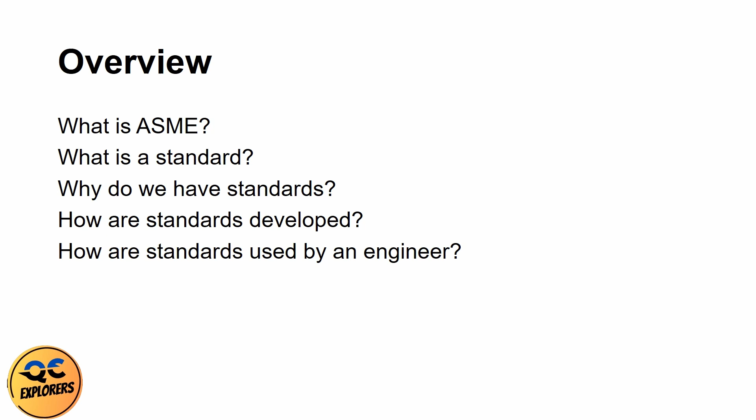First, what is the American Society of Mechanical Engineers? ASME, also simply known as ASME, is a professional engineering society that serves many roles, including hosting technical events, public affairs and outreach efforts, student and early career development, and standards and certification.

ASME's mission statement is to serve diverse global communities by advancing, disseminating, and applying engineering knowledge for improving the quality of life and communicating the excitement of engineering.

ASME was founded in 1880 to provide a setting for engineers to discuss concerns brought by the rise of the Industrial Revolution. The Society's founders were some of the more prominent machine builders and technical innovators of the late 19th century, led by prominent steel engineer Alexander Lyman Holley, Henry Rossiter Worthington, John Edison Sweet, and Matthias N. Forney.

Today, ASME focuses on technical issues, training and professional development, research advancement, government relations, and other forms of outreach. ASME has a presence within North America and around the world, with over 140,000 members in over 150 countries. We are one of the world's largest technical publishing operations.

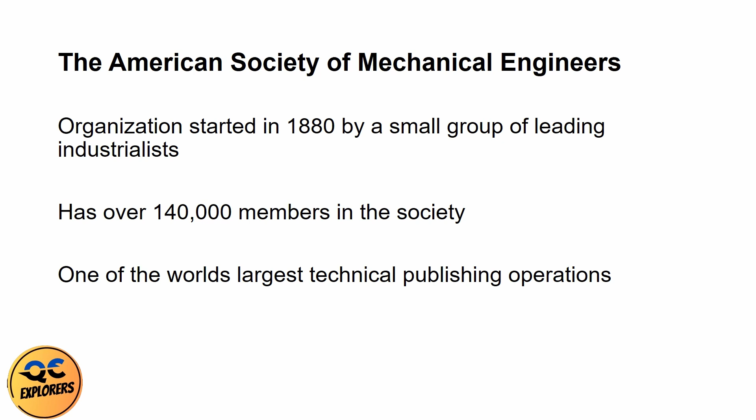Next, what is a standard? A standard is a set of technical definitions, instructions, rules, guidelines, or characteristics set forth to provide consistent and comparable results, including items manufactured uniformly, providing for interchangeability, tests and analyses conducted reliably, minimizing the uncertainty of the results, and facilities designed and constructed for safe operation.

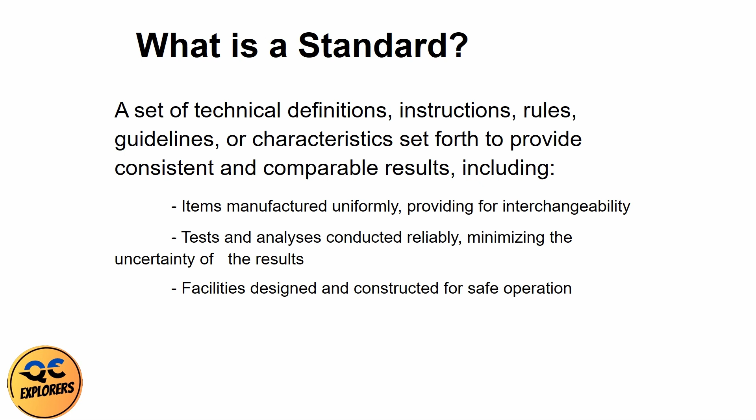Standards are documents that could help provide a reference baseline for making engineering decisions. They are written using engineering experience and generally accepted practices.

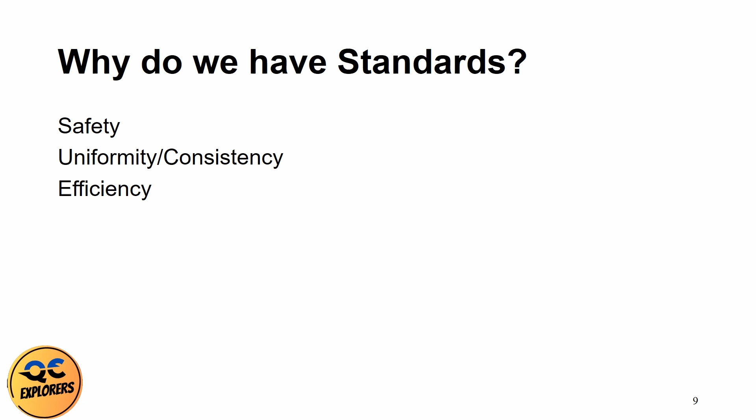Why do we have standards? Standards are considered a common language that benefits manufacturers, designers, and consumers. Having standards helps minimize situations where we could be re-engineering the wheel. All standards promote four key principles: safety, uniformity and consistency, efficiency, and commerce and trade. In the following slides, we will further define these four principles.

Around the time of the founding of the Society, many industrial accidents were occurring due to a lack of safety standards and oversight in the industry. One of the accidents that stands out is that of the SS Sultana.

The SS Sultana was a Civil War-era Mississippi River steamboat paddle wheel that contained 4 boilers. The Sultana was used to transport Civil War soldiers, livestock, and cotton. It regularly went from New Orleans to St. Louis. On April 21, 1865, the steamer left New Orleans carrying livestock and Civil War POW soldiers.

In Vicksburg, Mississippi, the Sultana made a scheduled stop to pick up more passengers and made a series of hasty repairs to the boilers. Rather than have a bad boiler replaced, a small patch repair was made to reinforce a leaking area. A section of bulged boiler plate was removed, and a patch of lesser thickness than the parent plate was riveted in its place.

The repair took less than a day, while a replacement boiler would have taken 3 days. The steamship was way past its maximum capacity. The Sultana had a legal capacity of 376 passengers. It's estimated that after Vicksburg, the Sultana contained about 2,400 passengers.

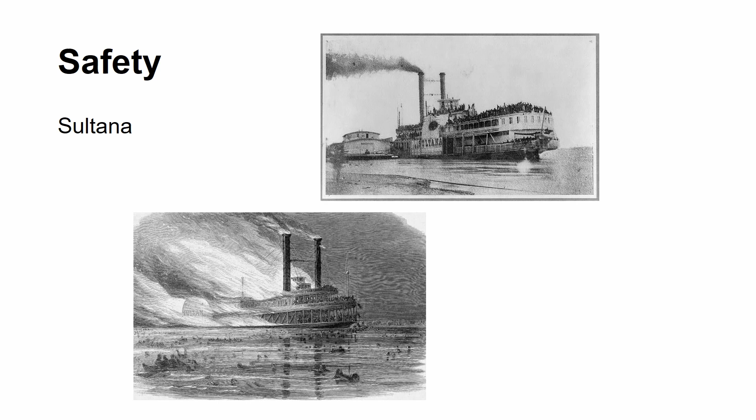The Grover Shoe Factory disaster is significant because it led Massachusetts to establish a Board of Boiler Rules. The board consisted of 5 members to oversee boiler regulations. It was the first of its kind.

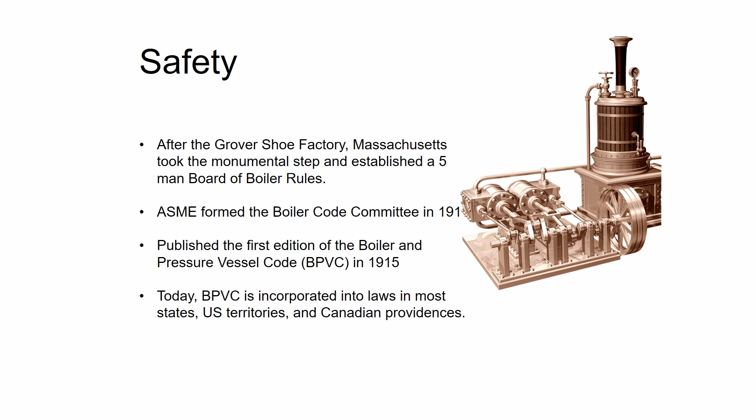Aside from addressing steam boilers, a big early problem was the lack of interoperability of fasteners. ASME helped set standards for things like screw threads, nuts, and bolts, which made it easier to service equipment with off-the-shelf fasteners. It also played a leading role in the development of important safety standards governing the safety of equipment like cranes and elevators.

Some key events in the development of codes and standards include: 1880, ASME established; 1884, first ASME standard for pressure testing of boilers; 1905, publication of first edition of standard for proportions of machine screw sizes; 1914, publication of first edition of the Boiler Code; 1916, publication of first edition of the Safety Code for Cranes; 1918, founding member of American Engineering Standards Committee, later known as ANSI; 1921, publication of Safety Code for Elevators.

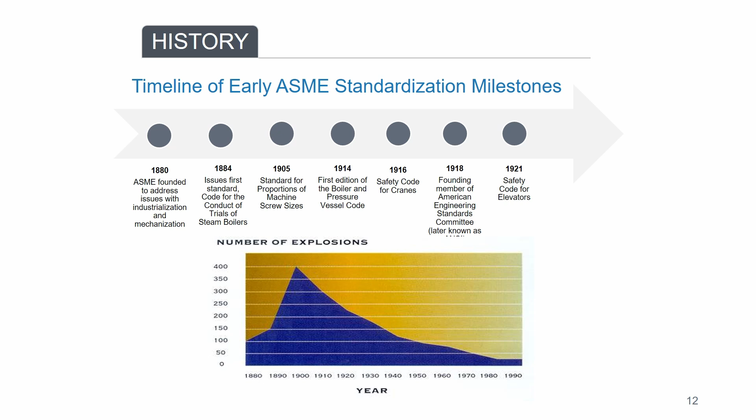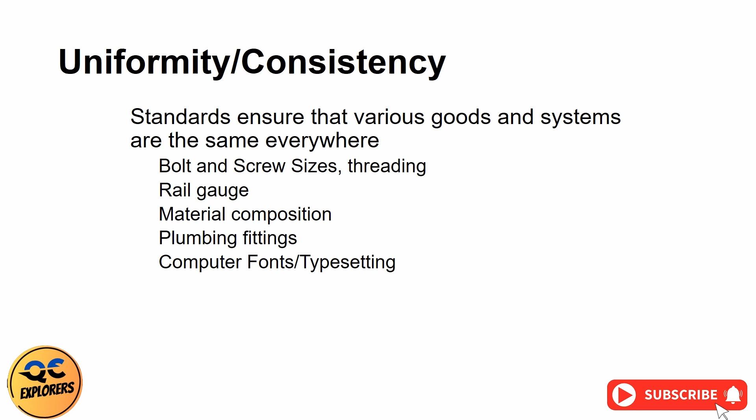Standards help to establish uniformity and consistency among products that you use every day. For example, thanks to product standards, an engineer does not have to concern themselves with who manufactured a bolt to know that it will fit with its corresponding size nut or washer. Another example is that a train can get from New York to California thanks to standardized rail gauges. These are a few small examples of the effect of codes in everything around us.

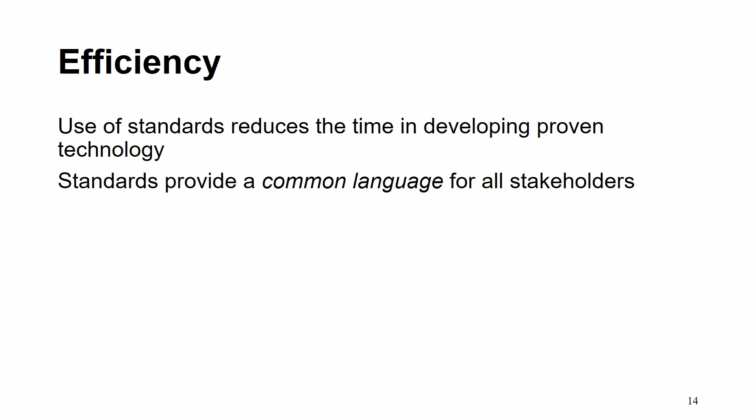Using standards helps to reduce production time by using existing and proven technology. Standards do this by providing a common language for all stakeholders. Owners, designers, inspectors, and others can ensure consistency and uniformity in the design expectations. Manufacturing to a certain standard implies a high level of quality to the customer. By being consistent and effective in the design, a manufacturer can confidently reproduce existing designs in large quantities.

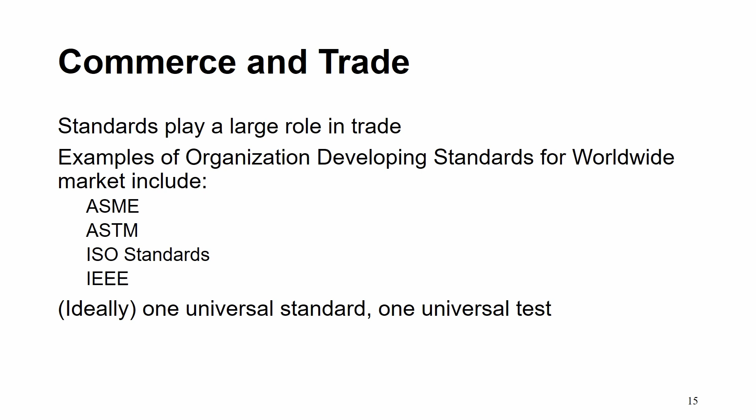There are various standards development organizations, SDOs, that develop standards for industry: ASME, the international ISO standards, ASTM, and IEEE are all examples of organizations producing standards for the worldwide market. Ultimately, it is the goal for manufacturers to have one standard and one set of criteria worldwide to streamline the manufacturing process. Next, we will discuss how standards are developed.

The American National Standards Institute, ANSI, is a nonprofit organization established in 1918. While ANSI does not create standards, they administer and coordinate the U.S. Standardization and Conformity Assessment System. ANSI acts as a clearinghouse, which approves standards submitted by accredited SDOs, designating them as American National Standards. They also help to make sure that no two SDOs are developing identical standards.

There are various types of SDOs, such as professional societies, trade associations, testing and certifying organizations, and organizations whose main business is standards development. A professional society is a nonprofit organization seeking to further a particular profession, the interests of individuals engaged in that profession, and the public interest. Some examples of professional societies are the American Society of Mechanical Engineers (ASME), American Society of Civil Engineers (ASCE), and the Society of Automotive Engineers (SAE).

A trade association is an organization founded and funded by businesses that operate in a specific industry, such as the American Petroleum Institute (API) or the American Gas Association (AGA). Testing and certifying organizations, such as Underwriters' Laboratories, perform testing and safety certification on products submitted to them. Some organizations where their main business is standards development are the American Society for Testing and Materials (ASTM), National Fire Protection Association (NFPA), and International Standards Organization (ISO).

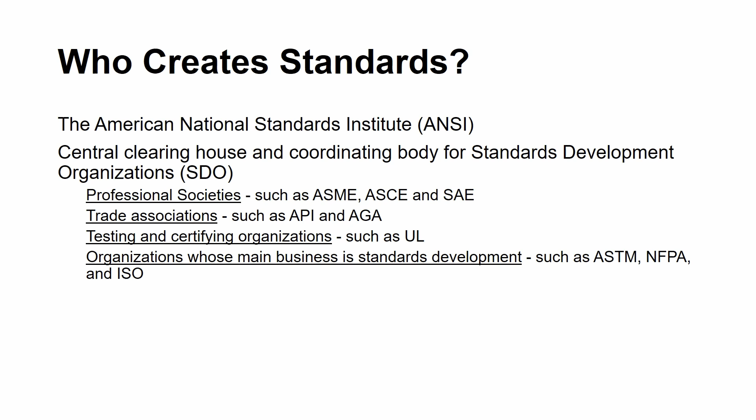There are several different types of standards. The first type is voluntary consensus standards. These standards are written by industry experts with the intent to benefit the majority of the industry. We will explore voluntary consensus standards in more detail in later slides. De facto standards are those which have become a standard because they are widely used, and the acceptance of them as a standard is determined by the marketplace. An example of a de facto standard is the QWERTY keyboard.

Consortia standards are developed by companies that agree to work together to solve a specific market need. Participation in the development of these types of standards is limited to members of the consortia and often requires a substantial financial contribution. Regulatory standards are either written or adopted by government agencies and are enforceable by law. Voluntary standards often become regulatory standards when they are incorporated into enforceable regulations. An example of a type of standard that does not fit into one of these previously described types are company or corporate standards, which are internal documents developed for their own use.

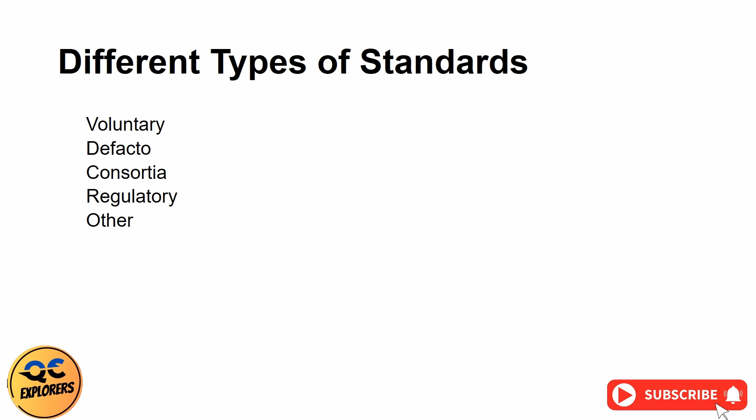Now, let's focus on how standards are developed within ASME in particular. ASME standards are developed by volunteers from industry and government and considered voluntary consensus standards. This means that the standards developed by ASME are approved using a consensus process, which will be described on the following slides, and that their use is optional until it has been incorporated into law or its use has been mandated in a contract. ASME has established, and continues to establish, various committees which each take part in the development of one or more standards.

These committees are comprised of members who are volunteer experts from around the globe from various industries. These experts are the ones who help to keep ASME standards updated to meet the needs of the industry as it evolves. ASME recruits its committee members from all across the globe to be sure that ASME standards are relevant and to understand the local needs of all potential users.

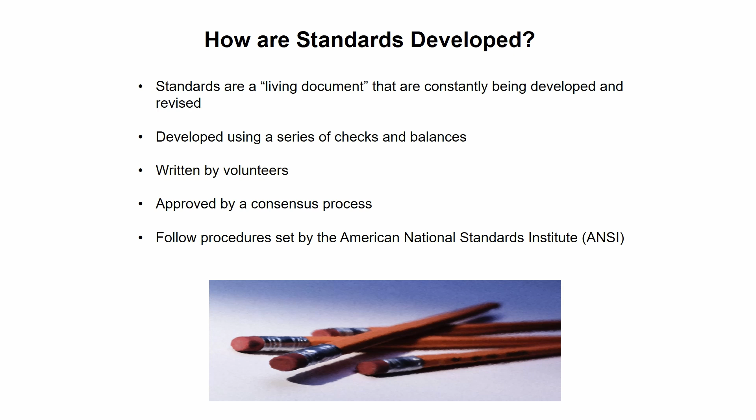ASME standards actions are approved by consensus. Consensus means there is substantial agreement by the affected interest categories on the proposed action. During the approval process, all views are considered and attempts are made to resolve any objections from the consensus body or any other source. In some instances, it is not possible to satisfy all objections.

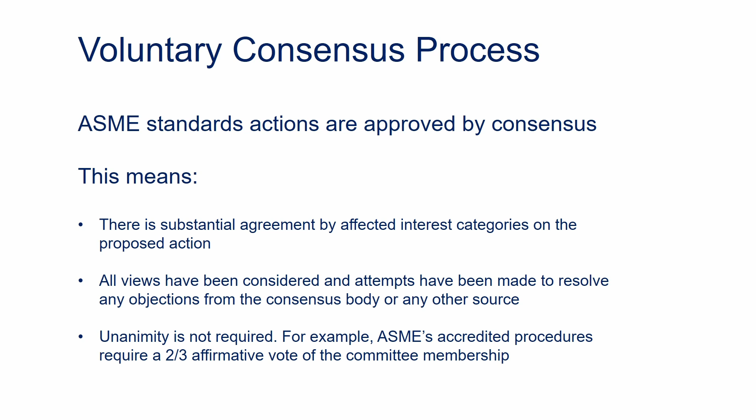For consensus to be reached, unanimity is not required. This means that after attempts to resolve remaining objections are made and the objection still stands, the item can move forward. ANSI procedures require more than a simple majority approval, but not necessarily unanimity. For example, ASME's accredited procedures require a two-thirds affirmative vote of the full consensus committee membership for a standards action to be considered approved.

There are three key principles of the consensus process: openness, balance of interest, and due process. Participation in the approval process is open to all those who are directly and materially affected by the activity in question. Participants in the standards development process are sought from diverse interest categories in order to maintain balance, so that no one category can control the direction of the standard.

All those who are affected have the right to due process. In regards to standards development, this means they have the right to express their opinion, have that opinion considered, and have the right to appeal if their suggestion is not accepted.

Now that we have discussed how ASME committees come to approve standards actions, here is a glimpse at the big picture of how a standard is developed from concept to publication. It all begins with the recognition of an industry need, engineering problem, or a new idea. Research is then needed to determine what is currently available and what types of solutions or processes are being used, if any.

Once it is determined that a standard is the right answer, its development is either assigned to an existing standards development committee or a new one is formed of experts from the related field. The development of the content of the standard can be a very lengthy process, particularly when there are strong opposing opinions. Once the content has been developed, it is sent through the approval process, keeping the key principles of consensus in mind as the action flows through the various levels of committee approval within ASME. Once it is approved by ASME, it is sent to ANSI for final approval and then proceeds to publication.

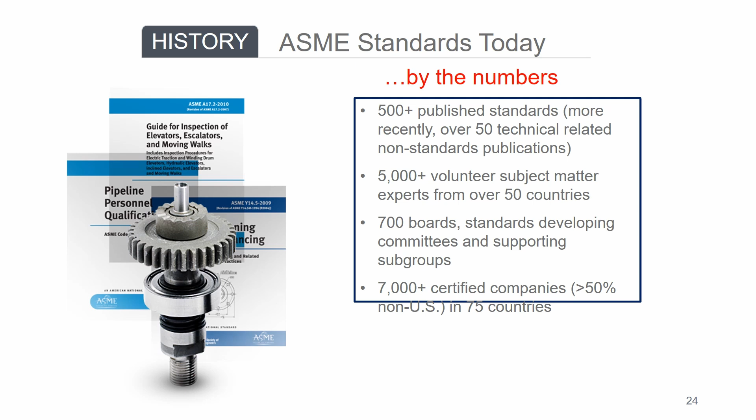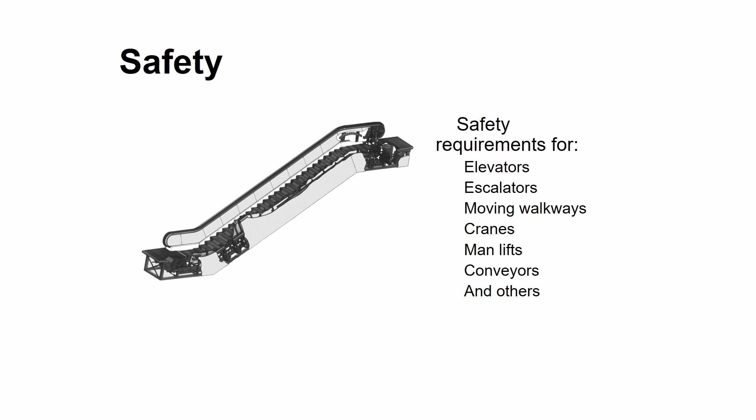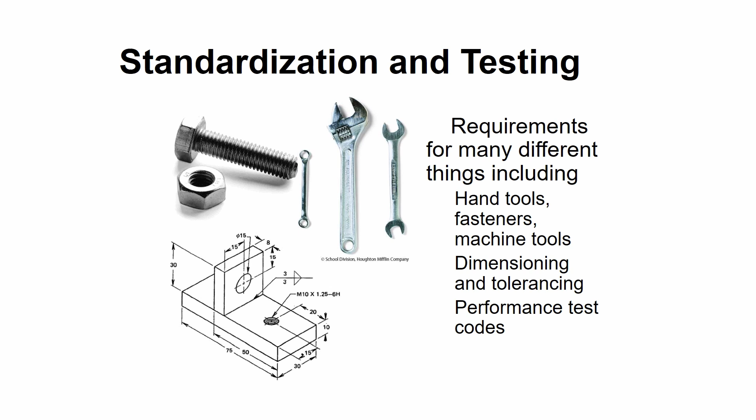Requirements for pressure equipment including boilers, pressure vessels, piping systems, and piping components. Safety requirements for elevators, escalators, moving walkways, cranes, man lifts, conveyors, and others. Requirements for nuclear components including containment reactors, piping, pumps, heat exchangers, and turbines. Requirements for many different things, including hand tools, fasteners, machine tools, dimensioning and tolerancing, and performance test codes.

ASME is always looking for new areas to standardize, especially when it comes to new and emerging technological areas. Some emerging technologies that ASME is looking to develop standards for are concentrated solar power, thermal energy storage systems, fuel cell performance testing, overall plant performance with carbon capture, nanotechnology, and supercritical pressure technology.

The process for developing standards for emerging technologies involves developing the need for the standard. This occurs through discussions with stakeholders such as manufacturers, researchers, and regulators. Typically, ASME needs technical data on these new technologies before any kind of standard can be written.

Much of this research is performed through the ASME ST LLC. The ASME Standards Technology Limited Liability Company identifies and conducts research projects to acquire data for the development of new standards for technology that has not already become commercialized. ASME ST LLC also performs research projects to make sure existing standards remain relevant to current industry practices.

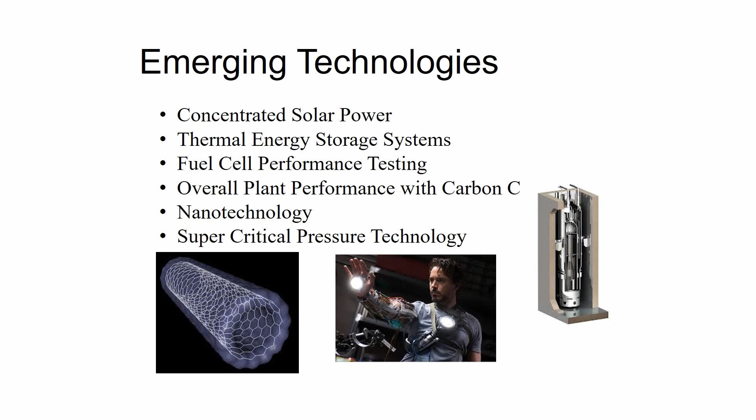Now that we've discussed what standards are and how they are developed by ASME, it is time to turn our focus on how standards affect you, the engineer.

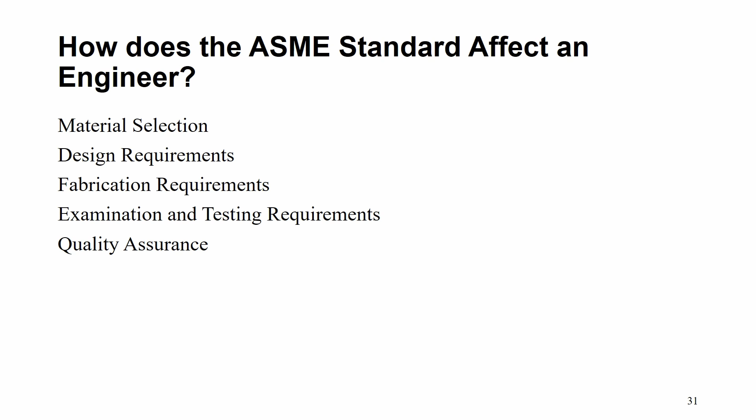ASME standards provide requirements and guidance to help ensure engineers develop safe and functional products. This includes selecting materials for fabrication and construction, providing minimum design requirements, acceptance criteria and procedures for examination and testing of equipment, and guidance on quality assurance programs for manufacturers. ASME standards also provide instruction on how to test the performance of equipment and components, and what is required in engineering drawings and other engineering functions.

Standards provide requirements on what materials are best suited for a given design application. This includes information related to material properties such as chemical composition, ultimate tensile stress, yield stress, and requirements for material marking and traceability.

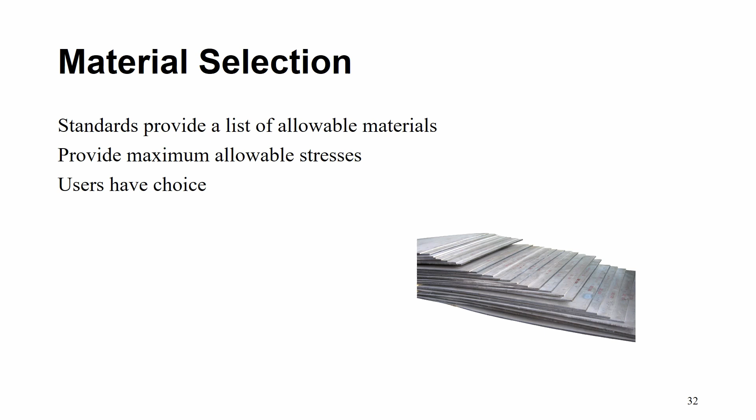Standards don't tell you what material to use for your application, just which options are available. It is up to the engineer to select an appropriate material.

Beyond requirements on how to select materials for construction, standards provide design requirements. One example is the design margin. Section 8, Division 1 of the Boiler and Pressure Vessel Code applies a design margin of 3.5 on the ultimate tensile stress of the material.

In the world of pressure equipment design, standards provide engineers with options for configuring equipment, such as permitted head-to-shell joints and required reinforcement for openings in the pressure boundary.

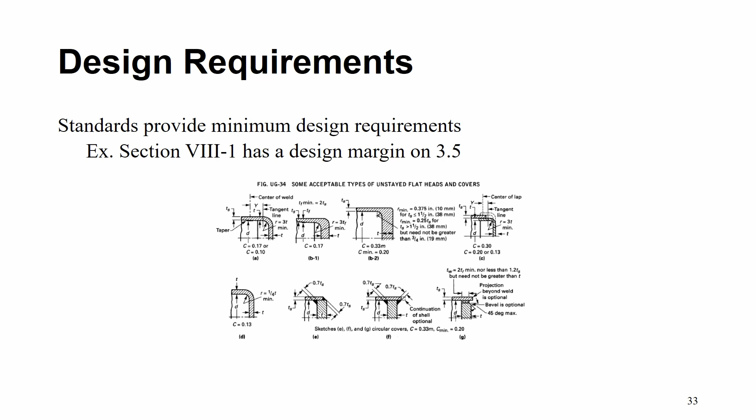Other standards offer design guidance for engineers in other industries. For example, the A17 Elevator and Escalator Code provides design requirements to ensure that elevator hoistways are adequate and that safety controls are properly designed.

Standards also provide engineers with necessary equations to help design safe products. These equations can help an engineer determine a pressure vessel's required wall thickness, design pressure, bearing loads, and many other possibilities. Standards provide the user with only the minimum requirements to make a safe design.

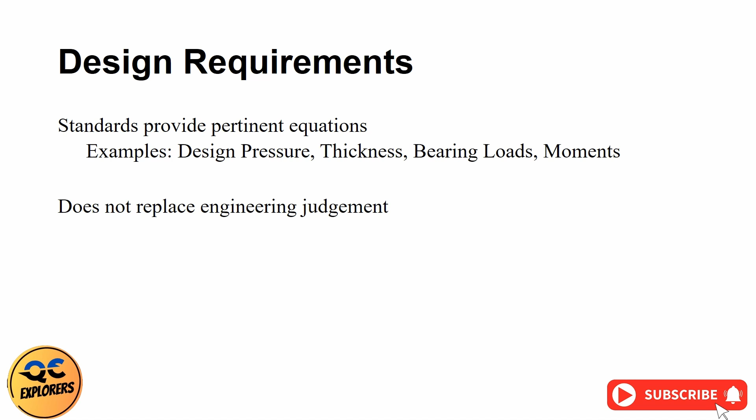Engineers are expected to use their judgment. Standards provide requirements and guidance on what types of material production is allowable. For example, bar stock or welded pipe can be selected for a nozzle.

There are requirements for manufacturing tolerances, such as dimensional tolerances on openings in vessels. However, many tolerance requirements are left up to the user and the purchaser to be determined when writing the order specification. Fabrication requirements help engineers determine which types of attachments to use, such as welding and bolting.

Guidance is provided on what type of welding to use, as well as what certifications and procedures are needed and how they should be documented.

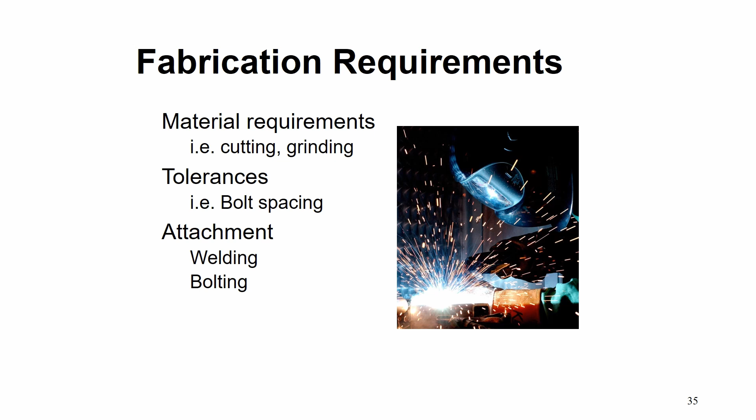Standards provide engineers with acceptance criteria for manufacturing processes as well, including out-of-roundness and local thin area issues that can occur. This includes requirements on how to address those issues if they are unacceptable.

Non-destructive examination is used to make sure that there are no significant manufacturing flaws. Radiography and ultrasound are used for such things as making sure that welds are solid and determining thickness of metal. Magnetic particle and dye testing check for cracking in the surface.

In addition to performing examinations, testing is performed to ensure the design is safe and that the manufactured product meets design expectations. Destructive testing is used to determine physical properties when they are unknown. A good example of this is performing a burst test on an oddly shaped pressure vessel to determine the design pressure when there are no standard equations that can be used.

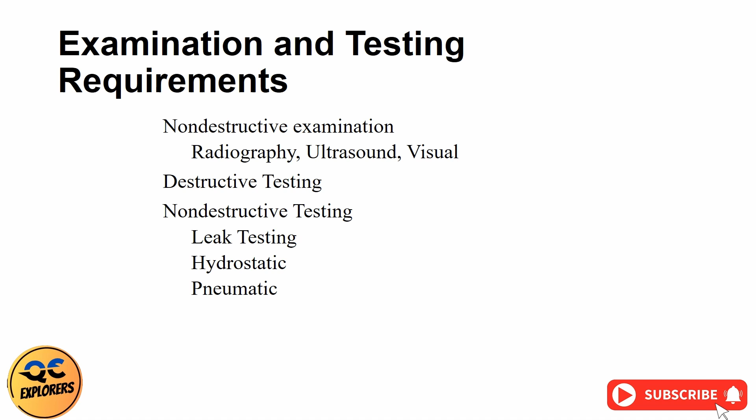Other types of destructive tests for pressure vessels include gunfire, flame, and drop, which are used to determine structural integrity. Non-destructive testing, such as hydrostatic testing, is performed to ensure that a manufactured vessel will not fail in a range where it can be expected to be operated.

Standards help engineers by laying out requirements for quality assurance. This includes filling out manufacturing report forms, structuring quality control documents, and marking the final product.

Data reports for boiler and pressure vessel codes contain critical design information such as the manufacturer's name, allowable pressures and temperatures, types of welding, and quality control personnel and inspector signatures. The form helps to demonstrate that the code was followed. Markings show that the product meets a certain standard.

Elevators, pressure equipment, shower heads, and other products all have markings either attached or stamped on to show pertinent information and the standard that was used in manufacturing.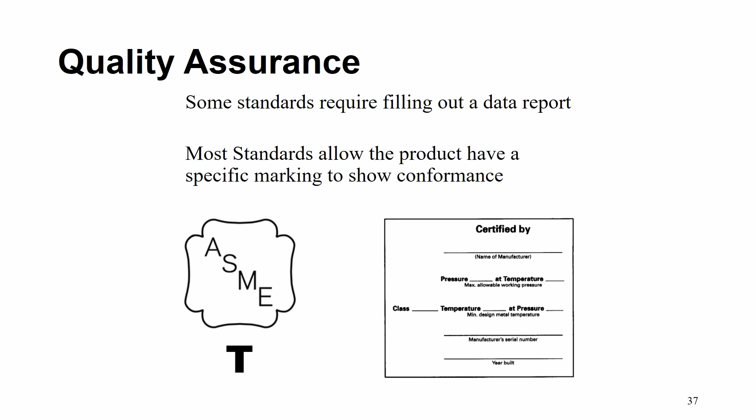The ASME Conformity Assessment Sector implements certification and accreditation programs to certify that manufacturers comply with standards such as the Boiler and Pressure Vessel Code. Accreditation is defined as a procedure by which an authoritative body, ASME, gives formal recognition that a body or person is competent to carry out specific tasks.

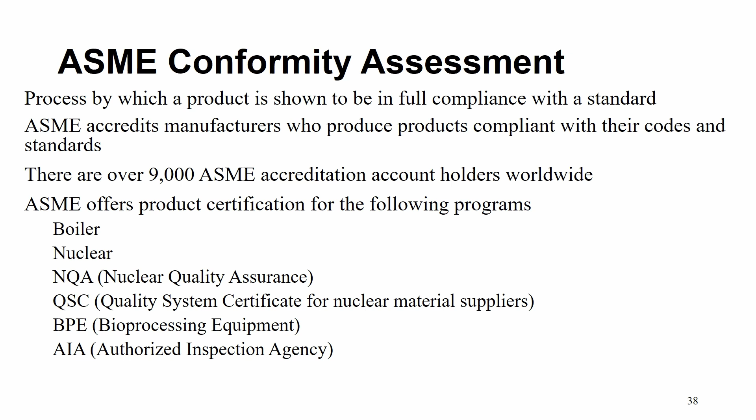ASME accredits authorized inspection agencies, AIA, which are entities that perform third-party inspection of the manufacturers who receive certification. ASME has product certification programs for boiler and pressure vessel manufacturers, nuclear component manufacturers and quality programs, bioprocessing equipment, pressure relief devices, and reinforced thermoset plastics.

In closing, standards have a wide impact on both engineers and the public, often in unseen and unappreciated ways. They make sure that products are manufactured reliably and safely, greatly reducing the risk to life and property of pressure equipment explosions. They also ensure interchangeability of parts and consistency, and ensure fair and free commerce and trade.

There are many organizations that develop standards. ASME develops standards using an ANSI-accredited voluntary consensus approach to ensure that standards are developed in a fair manner, with no one interest driving the process or the outcome.

Finally, standards are a key resource for engineers. They provide engineers with requirements and guidance on which materials to use, what equations to call upon, how to construct, and how to ensure the quality of products ranging from the simple screw to a reactor or elevator.